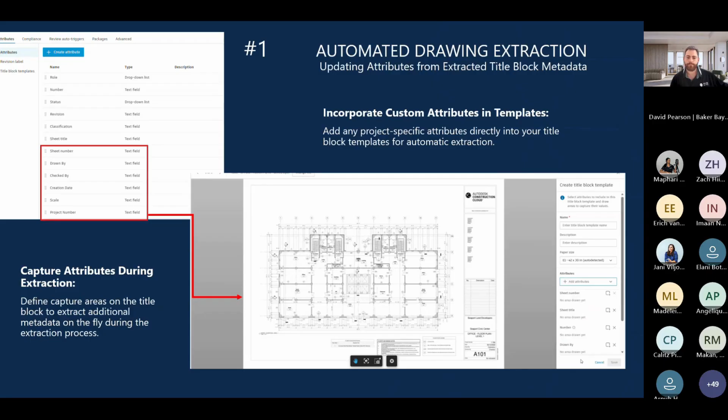Okay, zoom up into the space. What you're going to do is draw an extraction box around the area of information you want to relate to that specific attribute. This is an incredible feature, a new addition to the software, and I'm very excited about this.

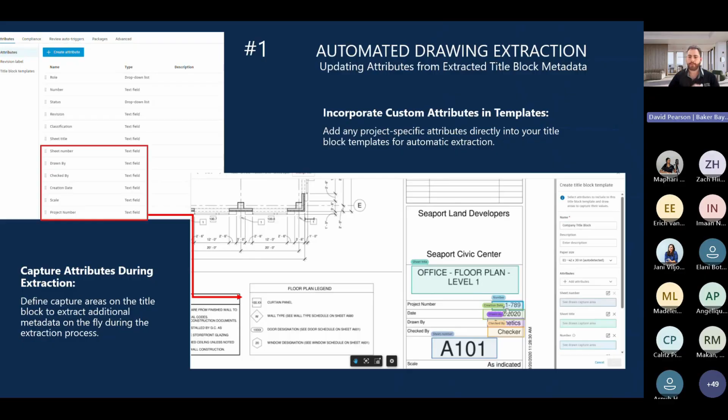What I like about this as well is the boxes are color-coded, so you can see exactly what box is relating to which specific attribute you have designed. This is basically a once-off thing, and you can extract it from a particular title block. Give it a name and save, as easy as that.

I'm going to show you what it will look like when we perform the extraction. I'm going to go to a list of PDF documents and select the PDF documents I want to perform this extraction on.

It gives you an opportunity to select a specific title block. Once you've identified that, you'll notice it will start capturing all those attributes that you've assigned. This process, depending on the amount of documents you've selected, might take a couple of minutes, but there's no lag in the process.

So we've extracted those documents, and what we'll need to do is just turn on those attributes in the file, and you'll see that all that information has been extracted from that particular document. This is metadata that you can then filter out, or you can find exactly what you need.

A nice example would be who actually drew or signed off the document, or who was responsible for the creation of the construction drawing. So you can use that in your filtering tools.

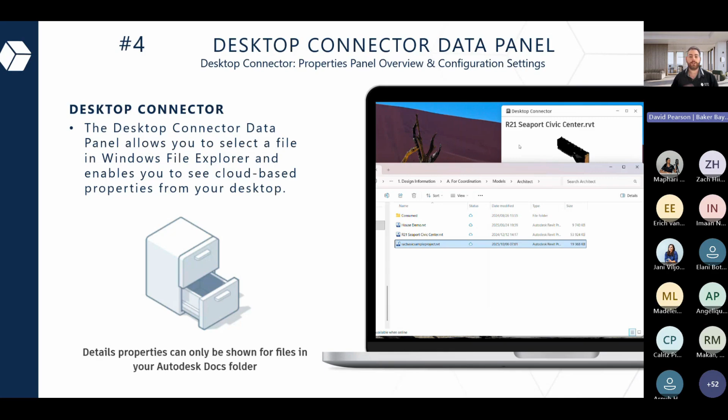But what's new about this, and this is the trick I'm giving you about Desktop Connector, is that you are now able to bring up the file properties without accessing the cloud. So that's useful - you want to know what the properties are, who updated the document last, what the file size is, what the format is. It helps identify the model locally. This is a simple trick, but very handy. It will please a lot of people, shall I say.

Okay, so now we're going to look into the model management side of things.

So we're going to boost your workflow with proactive clash detection. If you have BIM Collaborate Pro, I urge you to start practicing clash detection within the platform. A lot of people like using Navisworks to do this, but within the platform it's becoming increasingly apparent that you can achieve close to the same functionality as you would within the Navisworks application.

You're going to set up your coordination spaces and create federated models or combined models to be able to perform those clashes. What's nice about this is your clashes are color-coded, so you can easily identify that. You can create issues around that particular clash, and with issues you can assign the ball in court, or the responsibility, to a particular project member to action immediately. That's our clash detection side of things.

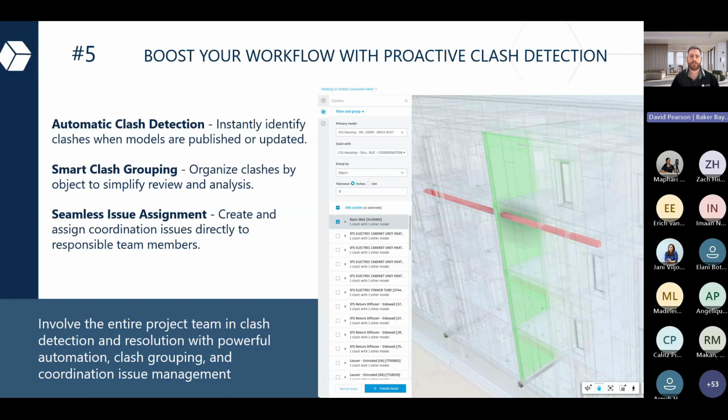But what's new? If you've harnessed that ability with clash detection in the platform, you can make use of the new feature called clash grouping via other metadata. So what does this look like?

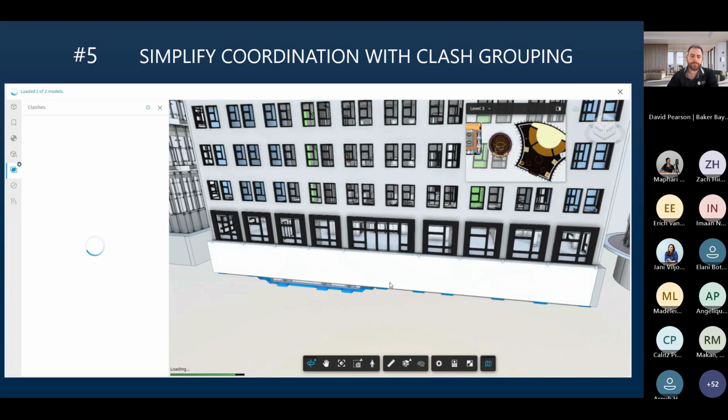If you access a coordination space and you access models that are clashing, you'll be taken to the model view or the federated model, where you'll be confronted by all the clashes that exist within this model comparison.

But instead of just being able to group the clashes by object, now you're able to group the clashes by family type, level, object name, or work set.

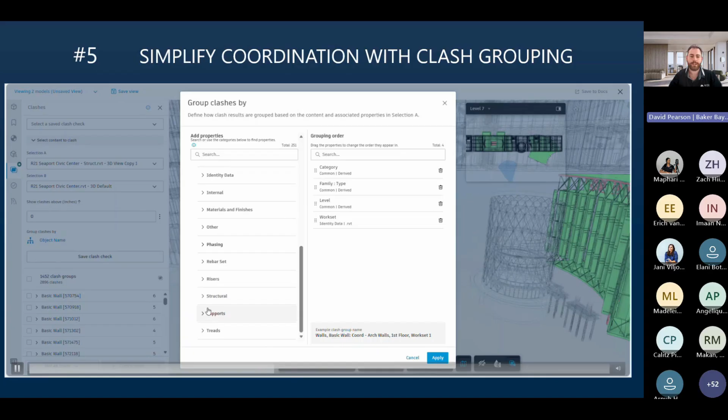What's brilliant about this is that if you've grouped a particular work set, you know who is dealing with this particular work set. So you're able to assign issues a lot more accurately in terms of who is responsible for rectifying that. Clash detection will work in the same way.

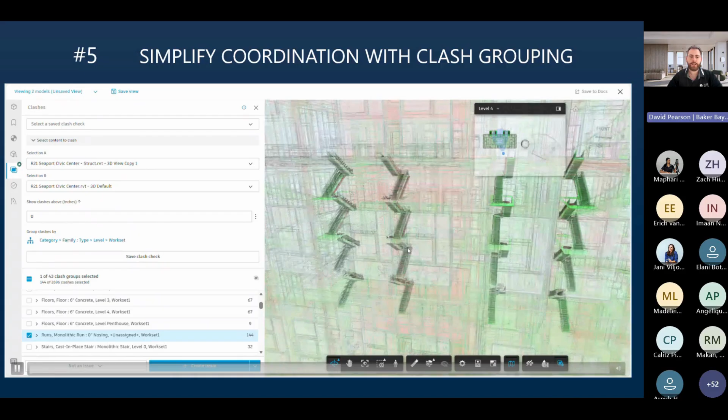You just click on the clash group and you'll be taken to the part of the drawing that is clashing, and then you can proceed by assigning issues to that. So this is quite an obvious clash - we've got two types of staircases clashing with each other. And because you now know the work set, you can approach the right people at the right time.

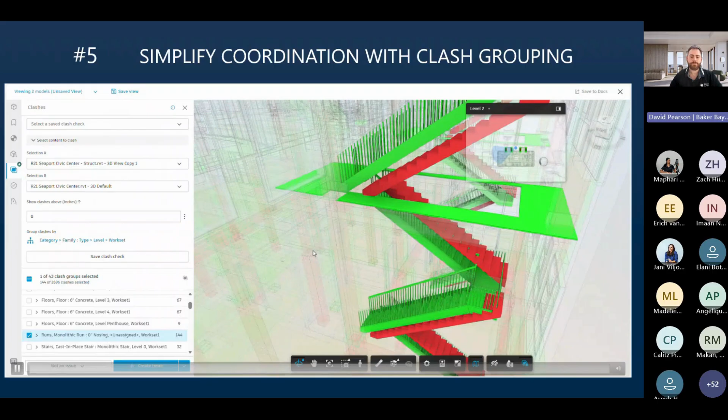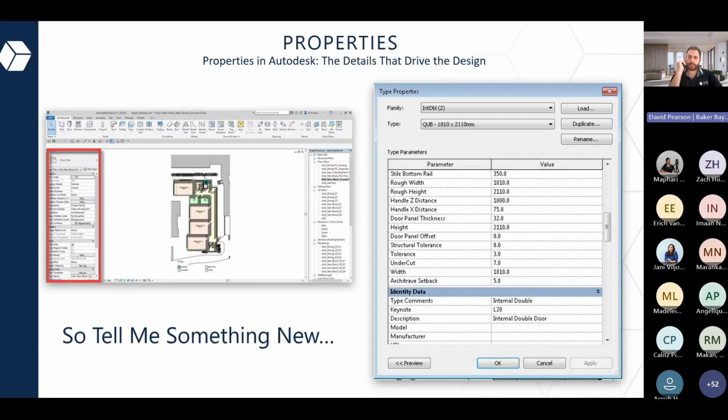Okay, so once you've harnessed the ability for properties, you can make use of extended parameters or extended properties within the platform. Let's have a look at what this looks like.

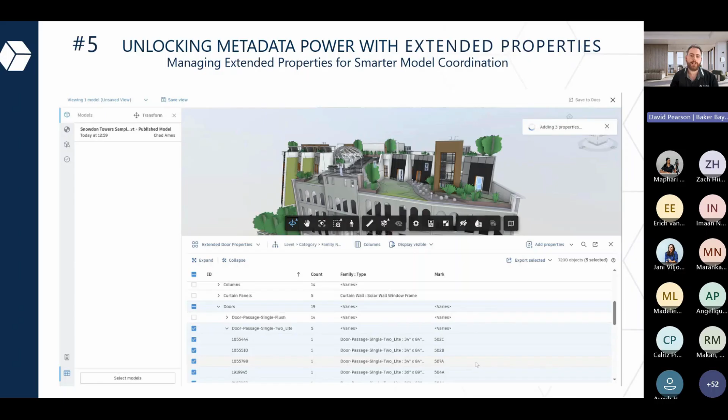Within your model coordination of BIM Collaborate Pro, you're able to assign new properties or metadata to specific objects within the model, and you'll see that we can group assign properties to multiple categories.

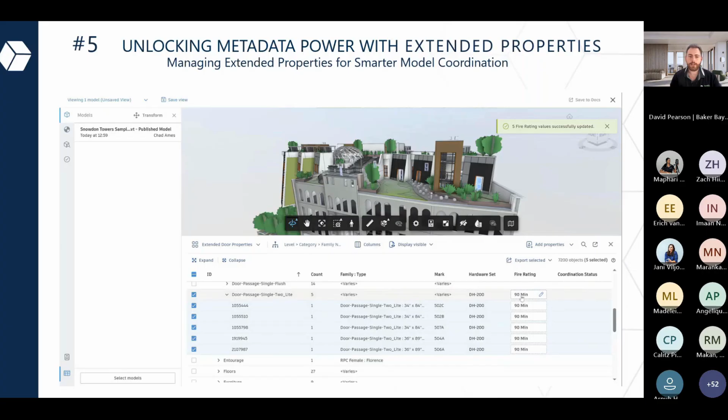A nice example would be your fire rating. If you want to ensure that all the doors have a fire rating of 90 minutes, you can use this tool within the platform to identify all the particular doors that don't have a fire rating of 90, select them, and bulk populate that metadata.

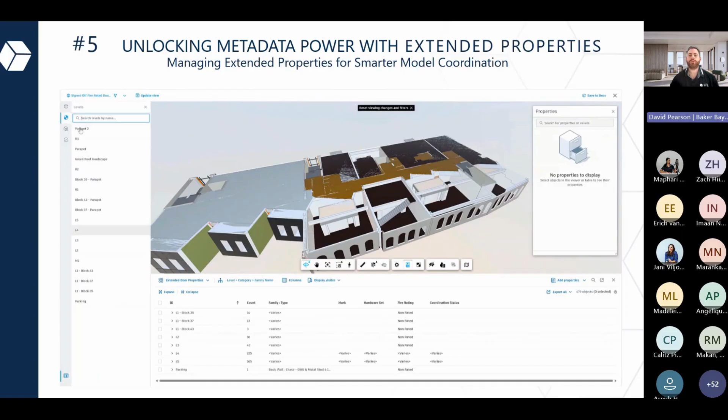The purpose of this extended properties tool is designed so you don't have to open up the application to do this. You can do it directly in the platform, which is very convenient for a lot of people.

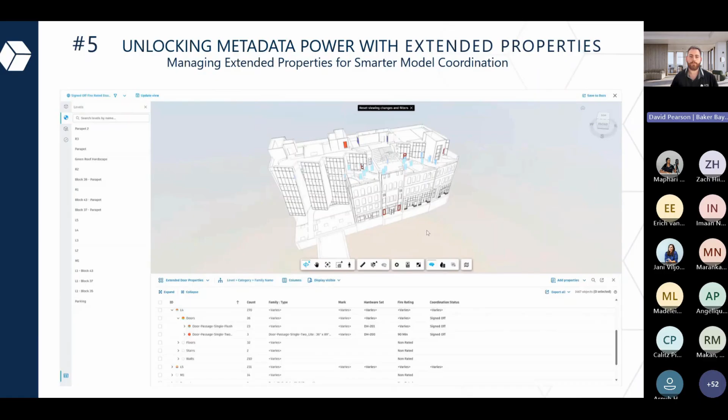Within model coordination, you can use this in conjunction with the color-coded tool to further identify all the fire rating of 90 minutes. Save that view into Autodesk Docs and exchange it with the various stakeholders or project members.

Now we're looking at construction operations. So when I think of construction operations, we are looking at the Autodesk Build product.

We're going to use specifications for easy reference. I encourage you to use this tool. I would say it's the most underrated tool within the platform. A lot of people sort of overlook it or don't use it. But once you get to know it, you will learn that this is an extremely powerful tool, making use of AI and machine learning to be able to sift through quite a vast amount of data at any given time.

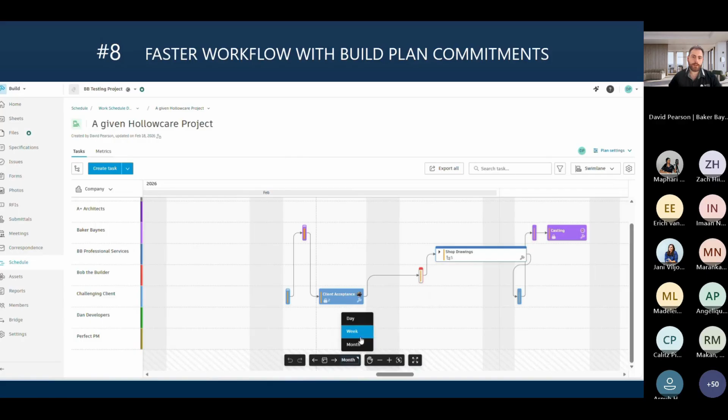So if you've harnessed the ability to use plans and commitments, one of the updates to this is plan metrics. This is basically an executive overview as to the percentage of people that have committed to the plans that have actually followed through with the plan of action. As you are updating your swim lane as to the completion of this particular task, you will now see an executive overview or insights as to what the main root causes are as to why certain plans or committed plans haven't worked out as planned. This is a very useful tool to look into the reasoning behind why tasks aren't being accomplished within a particular time frame.

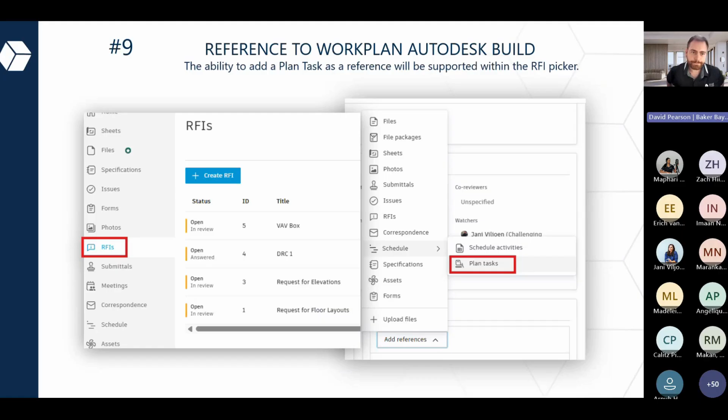All right, a simple but a goodie - tip 9 is reference to work plan in Autodesk Build. Previously you weren't able to reference work plan tasks throughout the platform, but now you can do it in RFIs. Basically anything - whether it be issues, specifications, submittals - you can now reference plan tasks throughout the platform. This is one of those simple tools that you might see as not really that great, but it means a lot to a lot of people. It's the type of tool you would have thought existed, but you don't want a wake-up call only to discover you can't accomplish what you need to. So it's nice to know we do have this ability now.

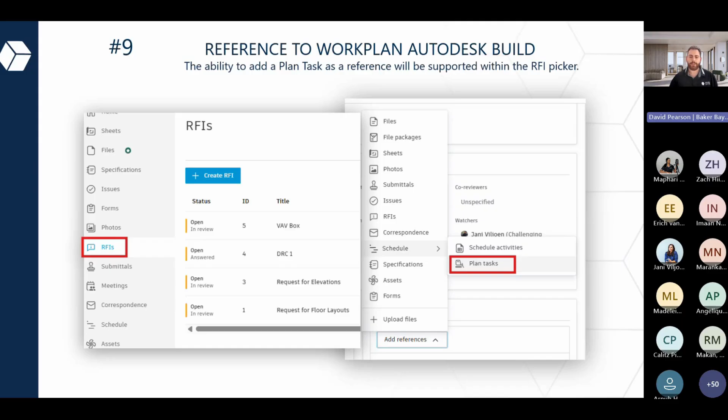If you know what forms are, I urge you to collaborate with ACC forms. This is a very important tip. And if you don't know what forms are, it's basically a digital collaboration to populate a form. You're not going to have a physical copy which you hand out to various people to write on a page. We're going to be doing this within the platform.

You can have multiple members collaborating on one form, and you can have particular parts of the form assigned to particular project members to fill out. We can also assign conditional logic to these. So in other words, if you said yes to something, you can substantiate it with an issue, an RFI, or a submittal, adding reinforcing documentation as well.

So explore the form builder readily available within the Build platform. It's going to change the world. It definitely changed mine.

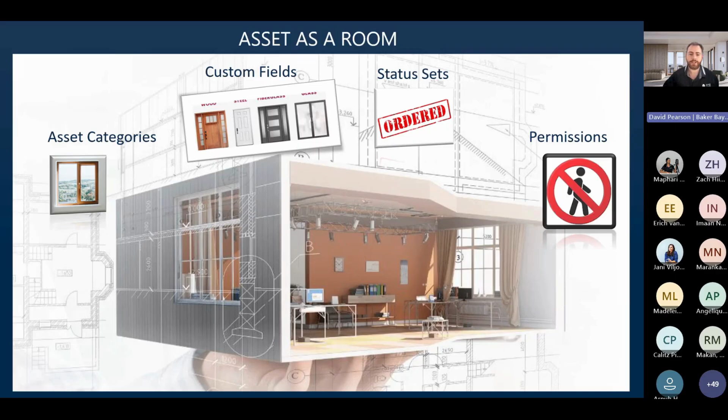But what I want to get into here is using ACC for asset management. This is quite incredible. If you are involved in asset management, I urge you to look into this. So bringing in a Revit model and creating those asset categories, such as your doors, windows, walls, and recording the assets' custom attributes is definitely the way to go.

You can see here that we are just updating and populating those custom attributes that we've created pertaining to those particular assets. And if you click on a particular asset, you'll be taken to it directly in the model, where you can then further substantiate or add references to those assets.

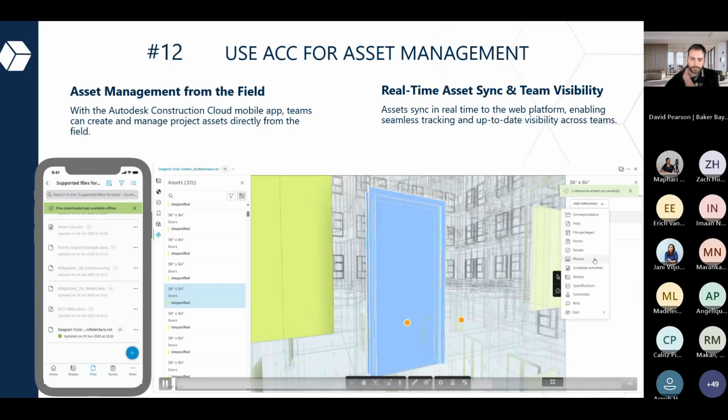So what does it look like in the cell phone version of this? If you're very good at playing games on your cell phone, you'll be fully equipped for using this. You can do it in exactly the same way, access the model and record all your asset categories from there. So all your custom fields can be updated. You can basically just zoom into the area, click on the particular asset you want to manage, and change the status. What's nice about this is once you change the status, this is color coded, so it will then change the color as well.

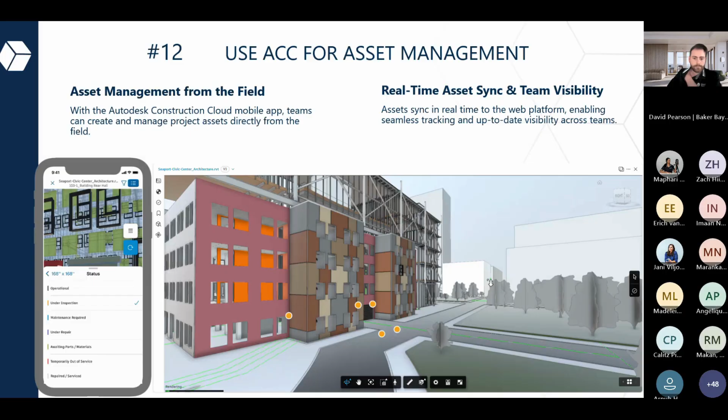All right, and lastly, export as-built data for project handover. So within account administration, or project administration rather, you are able to extract all project information and export it for that project handover. You can download a zip file of all the information that you want to include as part of your handover documentation.

And what's new about this is that you are now able to incorporate assets and asset categories within your handover documentation as well. So all the assets, you can choose which assets you want to incorporate in the documentation, and then extract that and download as a zip file to give to your client.

All right, so key takeaways from this: automate and organize. I urge you to use those attributes, the drawing extraction, file packages, and references. This is going to streamline your workflow like you won't believe. Another way to streamline your workflow is auto triggers with reviews, so get in touch with Desktop Connector, because then you won't have to go to the cloud every time you want to make an update. Use Desktop Connector and visually see your properties of your models and documents.